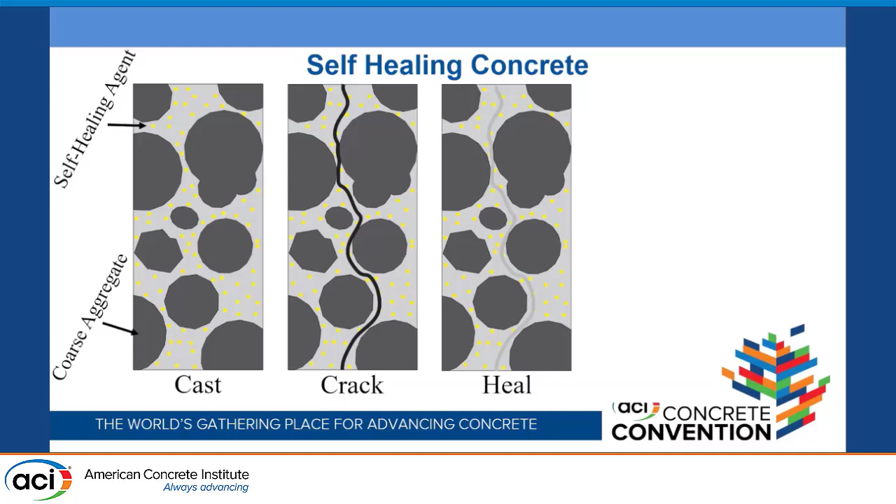The ultimate goal is that when further cracks form, you're just repeating this cycle, where additional self-healing agents rupture, precipitate more calcium carbonate, and you're able to heal multiple cracks again and again.

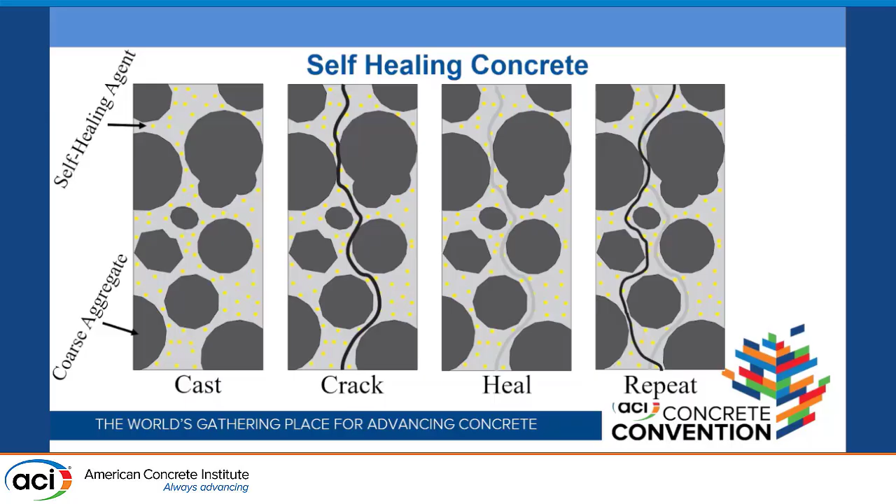Where things get interesting is when we start to look at structures that aren't cast concrete. 3D printed concrete differs a lot structurally from cast concrete, as well as microstructurally. First and foremost, you're going to have a significantly higher binder content, a finer aggregate, and an anisotropic structural behavior. All this means is that you're going to have a larger magnitude of shrinkage, which is going to amplify all of your cracking issues.

Secondarily, we have our interlayer areas in our 3D printed concrete. Those interlayer areas typically are much more significantly paste rich, meaning that we have potential for a region of lower self-healing agent concentration. This is something that we're trying to prove. Additionally, in these interlayer areas, there's generally a higher air content.

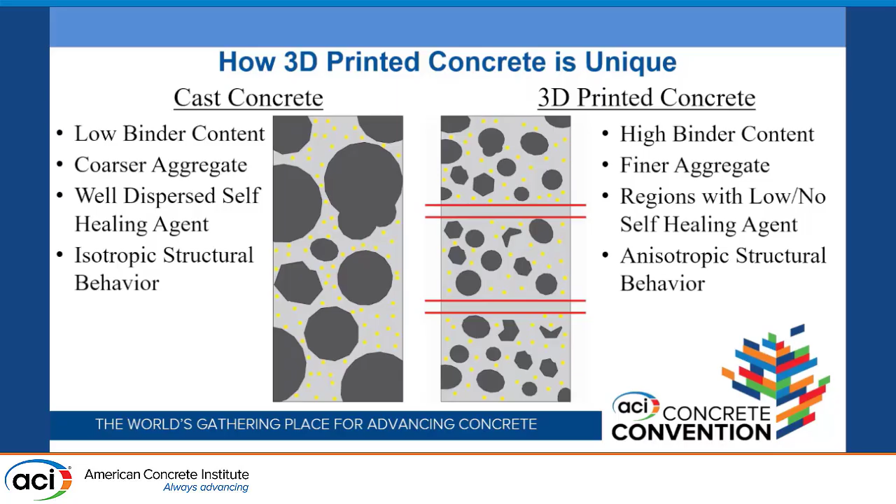Using these general ideas, we started to come up with a hypothesis. We postulated that compared to conventional cast concrete, the effectiveness of self-healing agents in 3D printed concrete is going to be less effective at healing cracks.

We built that around the idea that we believe the reduction in effectiveness is going to be influenced by the uneven distribution of self-healing agent in 3D printed concrete. Essentially, we believe that there may be regions where there is not enough self-healing agent to fully heal our cracks.

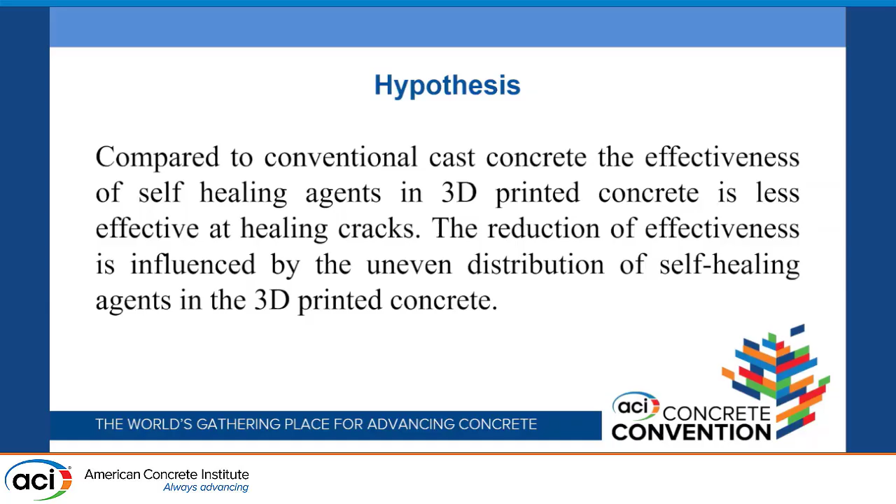Now, to test this hypothesis, we did a little bit of due diligence on the back end. We've done some testing with 3D printed concrete before, and we have our baseline control mixture, which includes a 10% addition of metakaolin, as well as a sand to cementitious material ratio of 1.427 and a water cement ratio of 0.35. We also include a high range water reducer and a set retarder just to extend our open window.

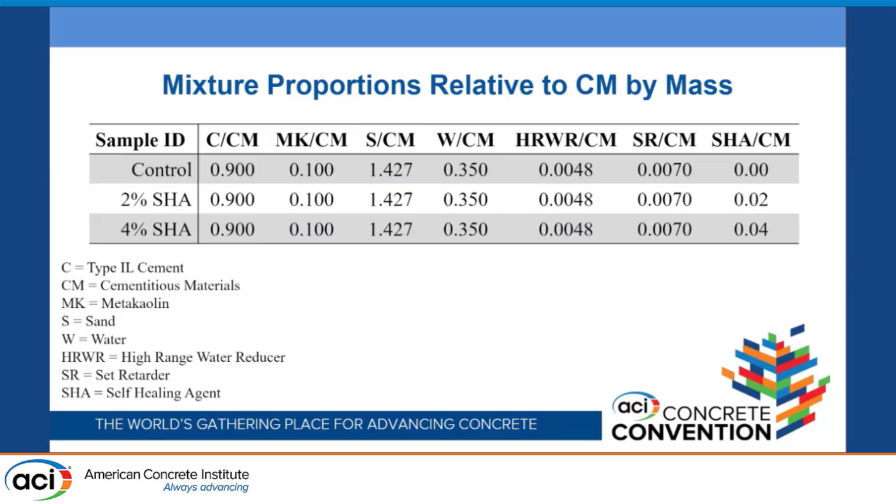And then we modified that mixture using a 2 and 4% addition of our bacterial-based self-healing agent, which we received from Basilisk. From that, we did some basic material properties testing to give it a little more additional background.

As you can see, we have our particle size distributions on our left side, where we have our sand and self-healing agent of comparable particle size distributions, with our self-healing agent being slightly smaller. Then we have our Type IL cement and our metakaolin as our cementitious materials, even finer than that, forming our paste. We've also included our composition from XRF of our Type IL cement and our metakaolin.

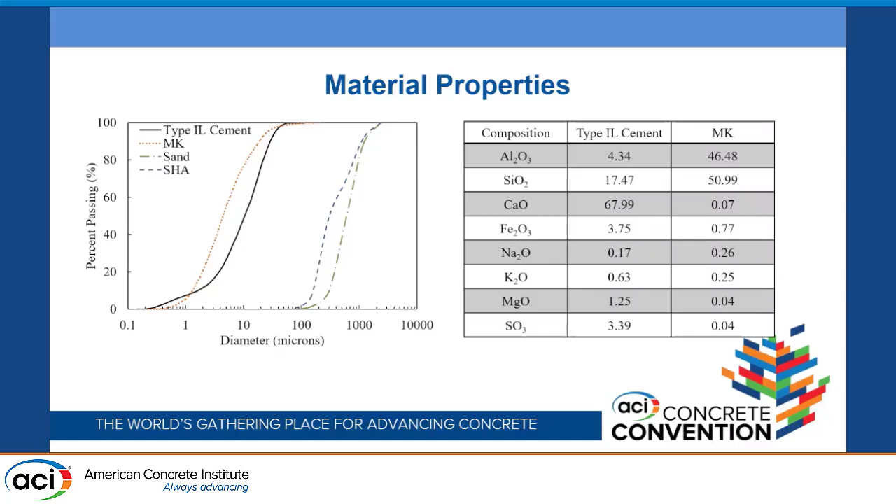From there, we did some basic background testing just to do our due diligence on our 3D printed concrete basic performance. We did 3 rheological measures for 3D printed concrete and 1 mechanical test.

For rheological performance, we first started with testing using the flow table, where we did a height retention test, which is simply molding your sample, and then before dropping the table, you demold the flow table, and you measure the change in height caused by self-weight. Typically, you want to see approximately an 80% retention.

We're around that throughout. Then for the flow table test, when you're actually agitating the sample, typically in literature we see in excess of 50% being acceptable. Again, we're ahead of that, up to 75%. Importantly, all of our samples were grouped together, indicating that we're having comparable rheological performance.

We then also did testing with the ICAR plus rheometer, just to gather some information on our yield stress and plastic viscosity. Our yield stress is on the lower end of what you'll see in literature, but it is still in the range acceptable for 3D printing from what we saw.

Our plastic viscosity is on a little bit on the higher end. But importantly, what we're seeing is that with the inclusion of self-healing agent, as it is comparable to the particle size distribution of a sand, we're starting to see an increase in our yield stress and a decrease in our plastic viscosity.

Lastly, from compressive strength testing, just to get some basic understanding of our mechanical performance, what we found was that we saw a slight decrease in compressive strength at 28 days with the inclusion of the self-healing agent, about 10% at 28 days with the addition of 4% self-healing agent, going from about 6,750 psi to about 6,000 psi.

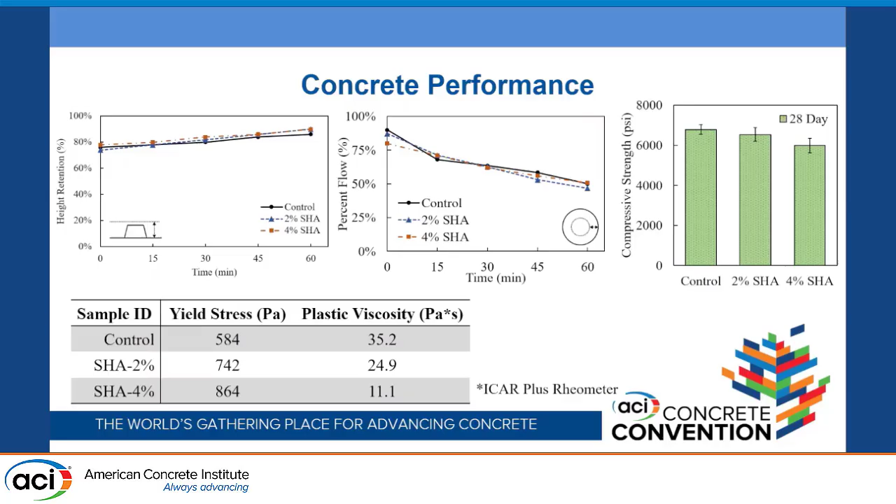After doing all this due diligence, we then came up with a plan of attack for our hypothesis. First and foremost, let's start with how are we going to actually generate our cracks. There's a lot of work that's been done with mechanical testing to essentially sub-ultimate load fracturing.

However, we wanted to generate these cracks naturally, and we did a modification of the shrinkage ring test, where we had to decrease our height and increase our width to make it castable, as well as make slight modifications to exposure conditions, since we didn't want to disturb the sample in its fresh state. Instead of moving it into an environmental chamber at 23C and 50% relative humidity, it was kept in lab conditions and covered with plastic, slightly changing the drying behavior, but still allowing for the test to occur.

Today we'll just be highlighting our test results for the shrinkage ring testing. We're still working out some of the kinks with our cast 3D printed concrete samples, but we'll get to those in the future.

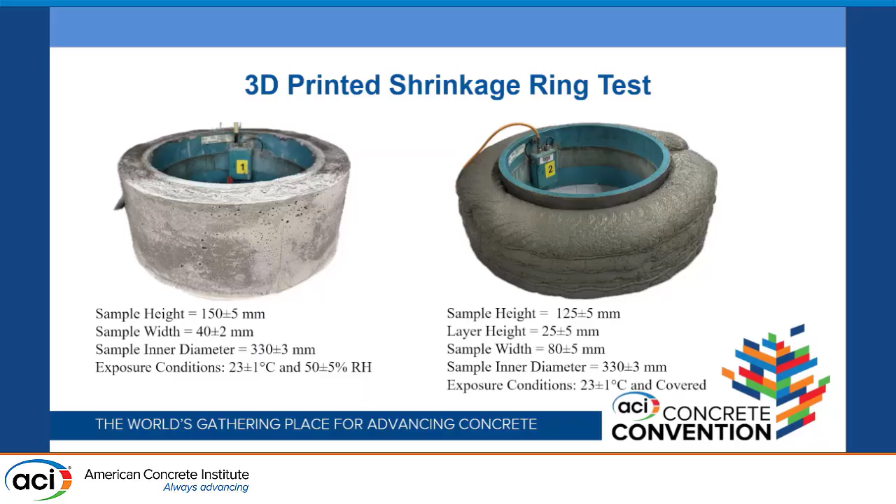After our samples were cast and cracked, we then transferred them from that 50% relative humidity condition to a 23C, 98% humidity condition to allow for self-healing. While continuing with that self-healing, we continued two different test methods.

We did an optical measurement of our crack widths. That was pretty simple, using a high-definition camera to get a precise photo of our samples, able to get a pixel size of approximately 67 microns, and then using grayscale, converting that picture into grayscale, and using image analysis to calculate the crack widths across the sample using scan lines to create an average value.

The second method is one that we generated, which we are calling the water transmission test. There's been a good bit of work in self-healing looking at water transmission as a method for analysis, as you're not always going to see the full magnitude of self-healing visually.

In this test, quite simply, what we did is we placed our shrinkage ring sample on an impermeable surface. We centered it, and we fill it with water. We keep it at a constant water head, and we allow that water to transmit through our crack. It goes down into the funnel, and collects in a bucket on a scale, and we measure the weight change through time to calculate our flow rate. Pretty simple, relatively easy, but it gives us some pretty reliable results.

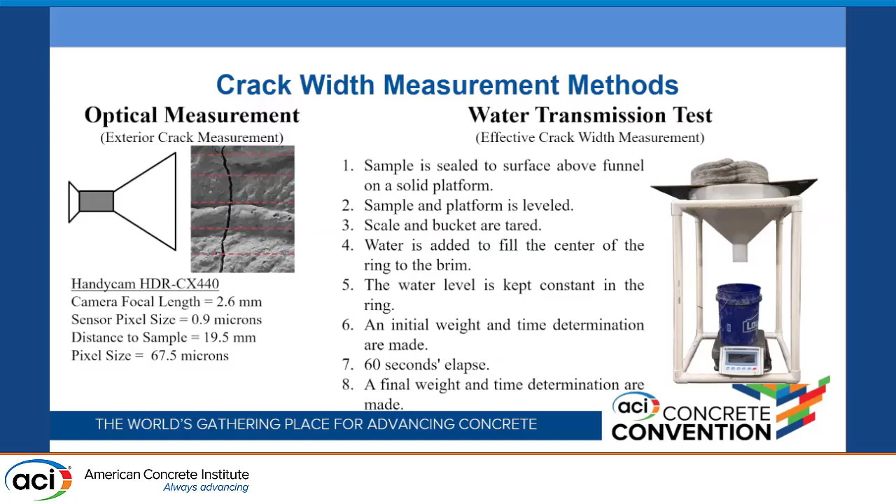Now, we created two test methods, and there are a lot of questions that go behind that, because how do you know those work? From that, we created three general questions, and then we had a lot of smaller ones that we collected along the way, but really weren't as meaningful, so we were able to push those away pretty quickly.

Our first question was: does this test matter? Does the modified shrinkage ring test results differ from the conventional ring test? Two, what is the magnitude of crack closure after removal from the test setup? Are we just going to close our cracks because of shrinkage after the fact? And third, does a correlation exist between our water transmission test in theory and our experimental results? It's nice, but does it actually work?

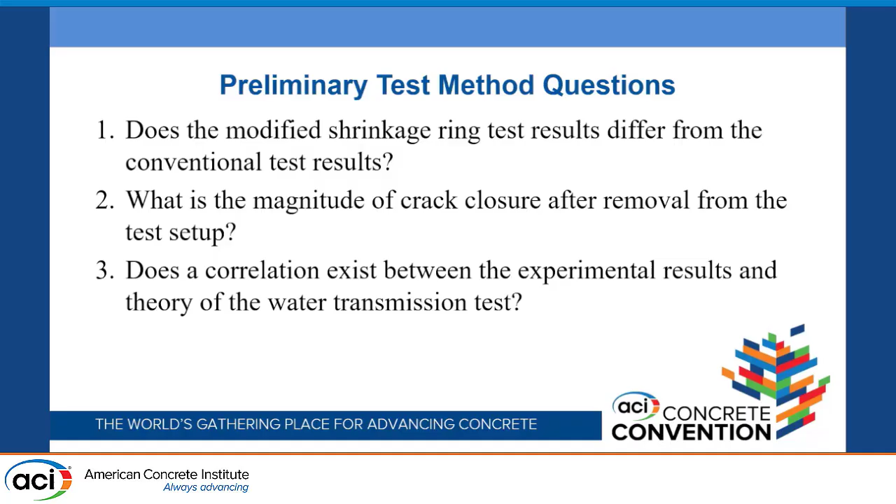Answering the last question first, doing a correlation of our test results, we had 10 existing shrinkage ring samples that were cast for a previous project. We took those samples, measured their crack widths visually, and then also measured them using the water transmission setup. We were able to get a pretty strong R-squared of 0.9, fitting with a polynomial trend, based on previous research on water transmission test setups using Poiseuille's law, where you're measuring essentially through two parallel surfaces of a crack.

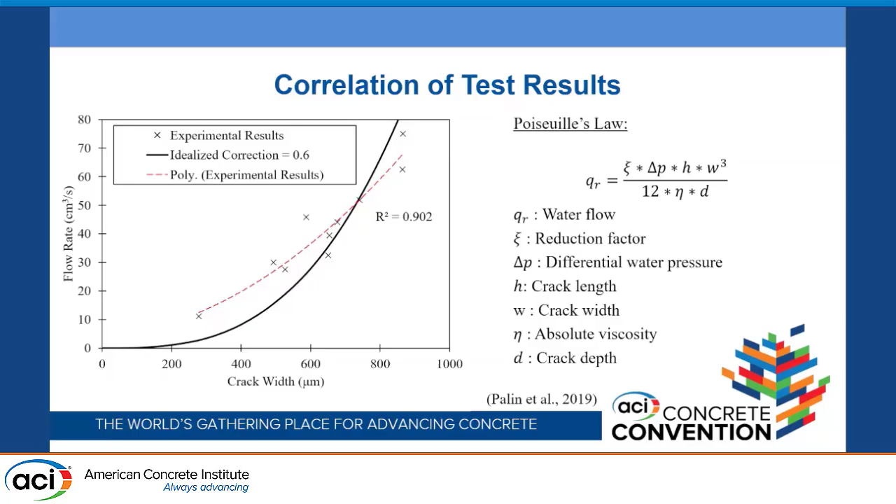We then tried to fit that data exactly to Poiseuille's law using the reduction factor of 0.6 that we've seen previously in research, and that was a little bit off. So we need to do a little bit more analysis, but we do have a correlation, though not a strong correlation with theory yet, and that's something we're going to keep working on.

After that, we then looked at the crack closure problem. Are these cracks just going to close after we remove them from the test setup? Because we did notice previously that when we left one on too long, a second crack would form, just because it's starting to re-tighten on itself.

What we found is that when we stored our samples at high humidities, we were not seeing that crack closure, just because shrinkage had been abated. But when we stored them at ambient conditions, we were starting to see crack closure again. This is more so just a testing procedure question—we can't test the samples, then leave them out for a day, and then test them again. We need to be very precise in our processes.

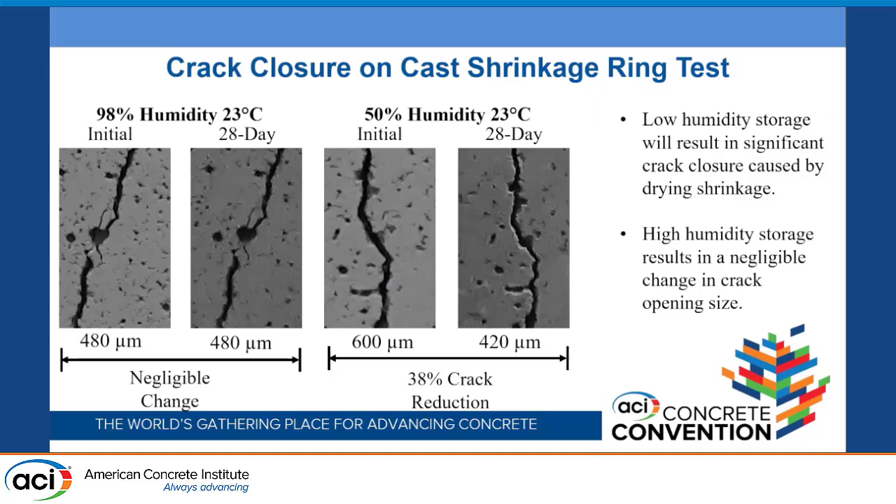After making these general questions solved, we were able to keep moving on with our work, and we started to actually look at our test results for our 3D printed samples. We fully completed 5 of our test samples so far, trying to complete more as we go. We have 2 controls, 2 with a 2% self-healing agent, and 1 with a 4% self-healing agent.

First and foremost, with our shrinkage ring data, we looked at our time to crack, a relatively good measure in the ASTM for your risk of cracking. As you'd expect with a 3D printed concrete mix with a high amount of paste, there is a high risk of cracking, but we can also see that the inclusion of a self-healing agent is extending out that time to crack. This is pretty much a function of the inclusion of the self-healing agent, also including some sugar to allow the healing reaction to occur. What we're seeing is an extension, but not a meaningful one in reducing the risk of cracking ultimately.

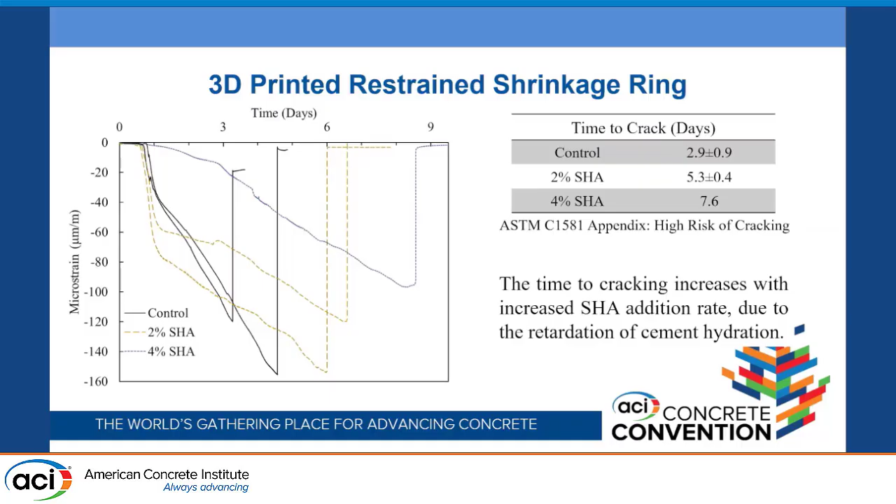After that, we then looked at some secondary parameters, specifically the peak strain and the stress rate of our 3D printed mixtures in the restrained shrinkage ring test setup. Again, we saw high risk—our stress rate was relatively high for all of these samples. Above 50 is generally considered high. As well as, again, we were starting to see a little bit of leveling off where our 0 and 2%, or control and 2% self-healing agent, were comparable, but our 4% was still decreased.

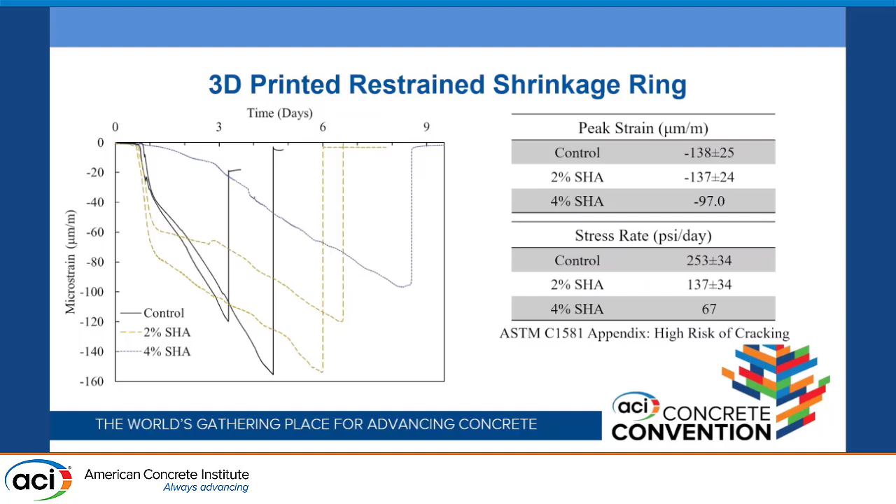After doing basic measurements for ring test results, we demolded these samples and started to monitor their self-healing along the front surface. We took initial measurements from across our samples. Our control was at approximately 400 microns, with our 2 and 4% being at approximately 500 microns in size, so comparable. Didn't see any self-healing initially.

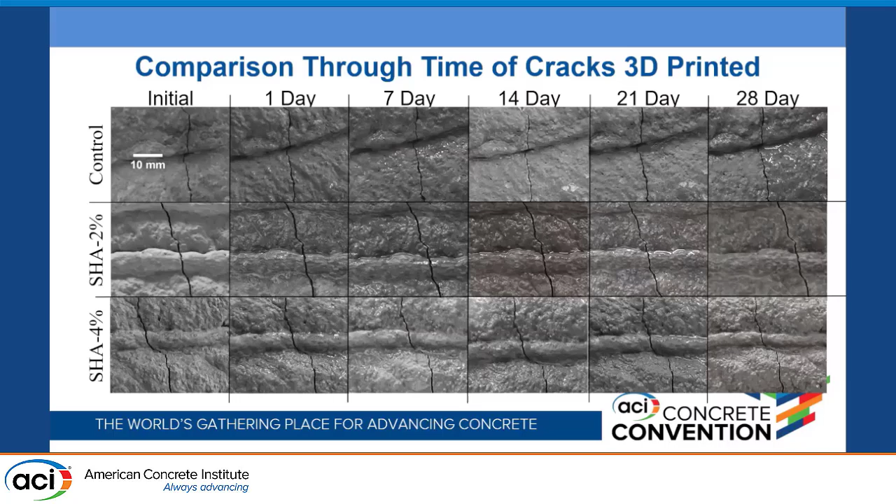Didn't see any self-healing through 7 days, got a little bit concerned. Didn't see any through 14, got very concerned. 21, very nervous. 28, didn't see anything. And I thought I was going to have to redo this testing, and then I moved our samples, and I noticed—just going to switch—all of our self-healing was visible on the bottom surface. Problematic because we didn't take pictures there, but it's something we'll do in the future.

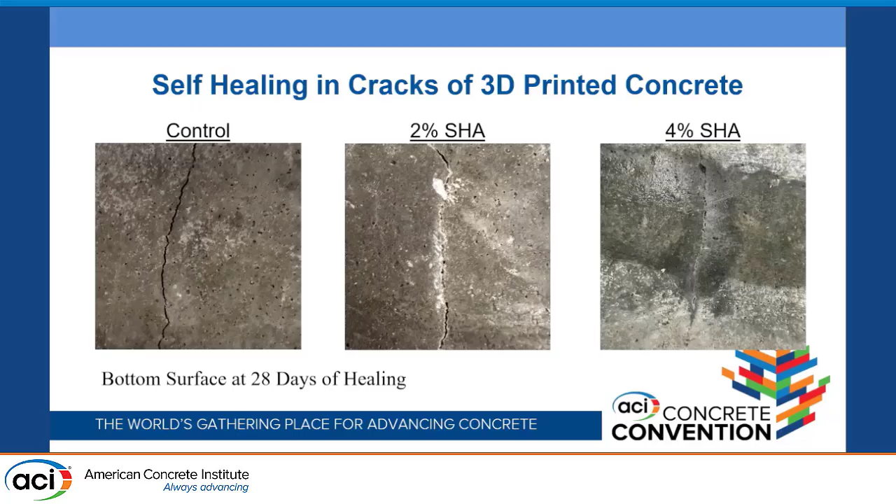And it led us to one of our major conclusions that when you're monitoring self-healing, a very important aspect is the direction of water flow. So all of our samples were stored horizontal, or essentially flat on the ground, and as your water collected through, your precipitates were forming downward. Important to note, because in the real world you may not see your self-healing, but you will see the effects of self-healing when you look at water transmission, as we will see on our next slide, which is our effect on the water transmission setup.

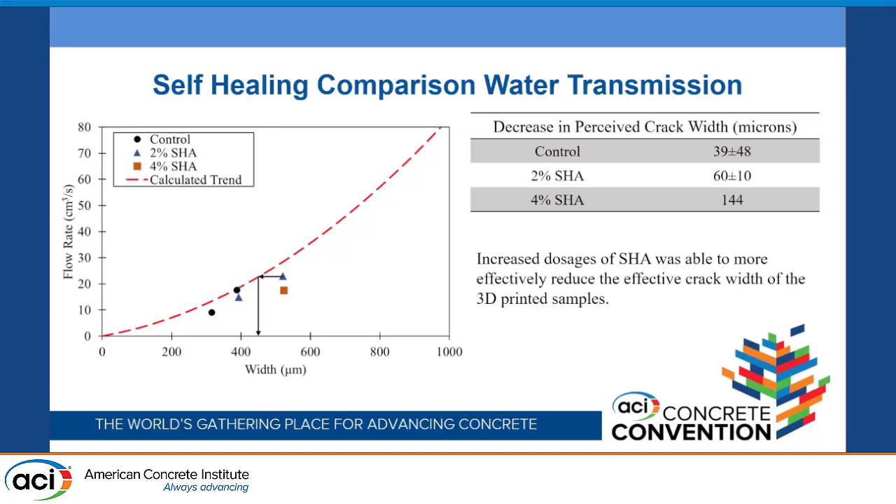From these results, we can take a couple of conclusions. First and foremost being that the inclusion of a self-healing agent in a 3D printing mixture will extend the time to cracking and decrease the peak strain. That the direction of moisture ingress will impact the direction of visible self-healing, impacting how you're actually perceiving your self-healing agent effectiveness. That optical methods for measuring self-healing are going to be limited and not always show the true effectiveness of the self-healing agents, and that the inclusion of self-healing agent can reduce the effective crack widths for water transmission of 3D printed samples.

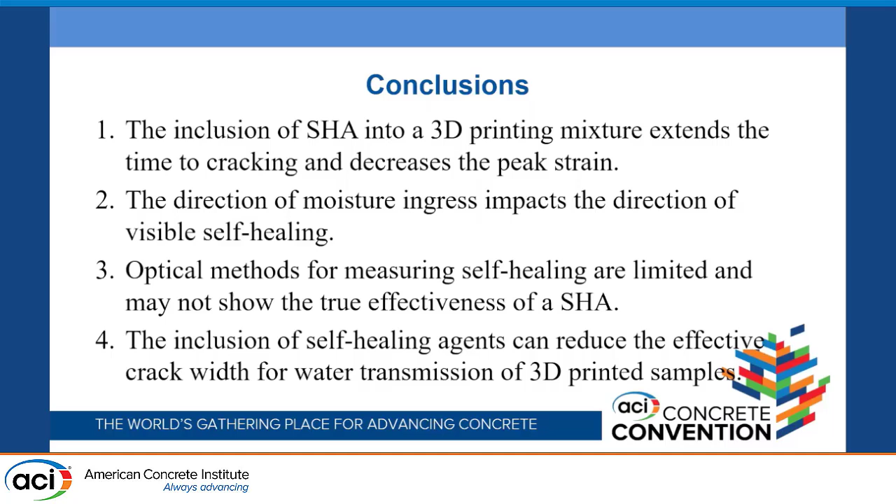We're continuing to work to make sure we're actually seeing if there's a differentiation between our cast and our 3D printed samples. In our continued work, we are completing additional replicates to improve our understanding of variability of these test methods, completing testing on our cast rings, as I just mentioned, as well as correlating existing fluid dynamic theory to water transmission results.